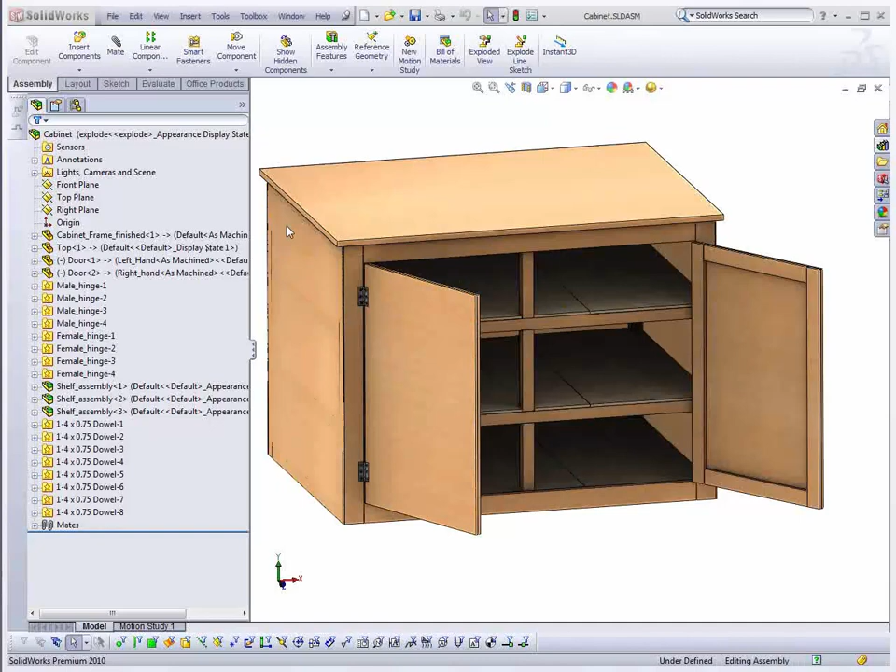This is a cabinet demo, which is another one aimed at a demo backwards approach, where we've got a finished product, and it's really more focused on the assembly level capabilities than on the part level features. Even though we've got weldments which make up the frame and the sides and so on, it's set up to really focus on the assembly level capabilities.

There's two elements to that. The first one we're going to look at is the smart component features. So you can see here we've got hinges which are part of the smart component library. We've got male and female hinge components, and when you do the smart feature on those, it does a cutout in the parent component that you've mated it to, and it also adds these wood screws automatically as well.

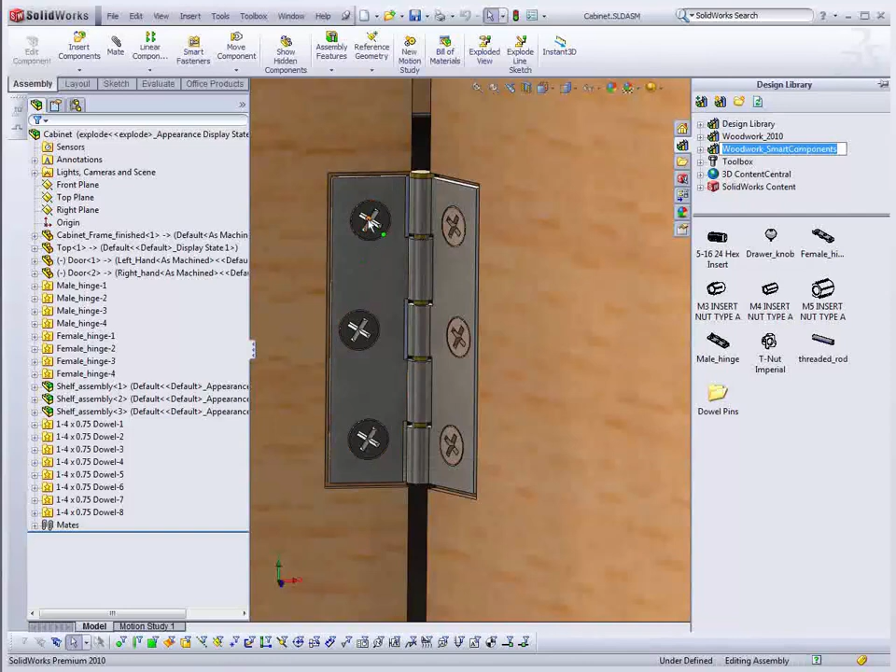One thing I noticed it doesn't do is it doesn't put holes for the wood screws, but we can fix that at a later point.

If you look at this frame, you'll see I've actually got coordinate frames set up here, and what I've done is I've put those there so that we can use the dowel rods to automatically put location pins to position the tabletop or the countertop on this cabinet automatically.

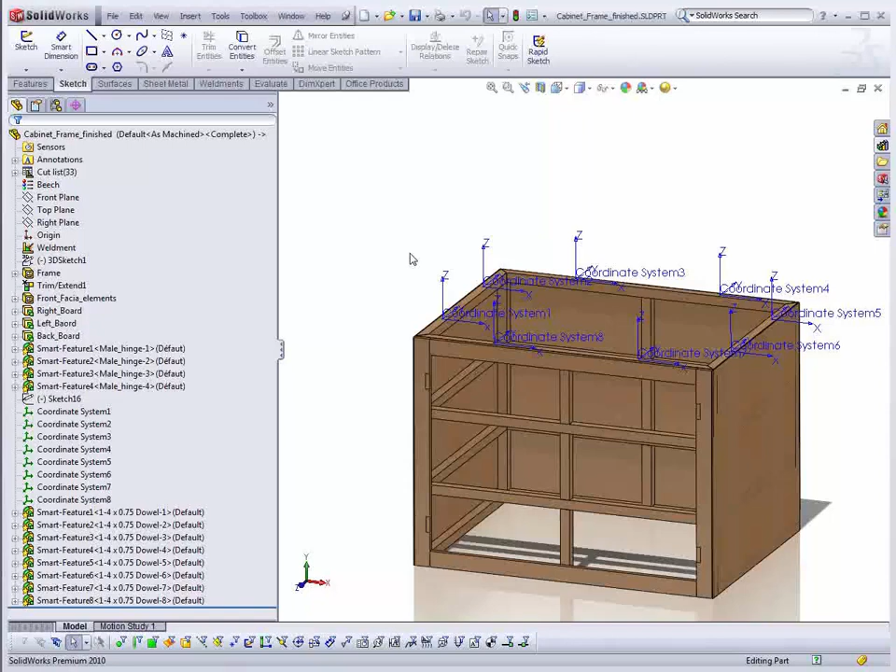So you can see here, if we go to our exploded view, we've got our dowel rods and our tabletop. Let's just turn ambient occlusion off for the minute. So our dowel rods go in, and then we can put our table on.

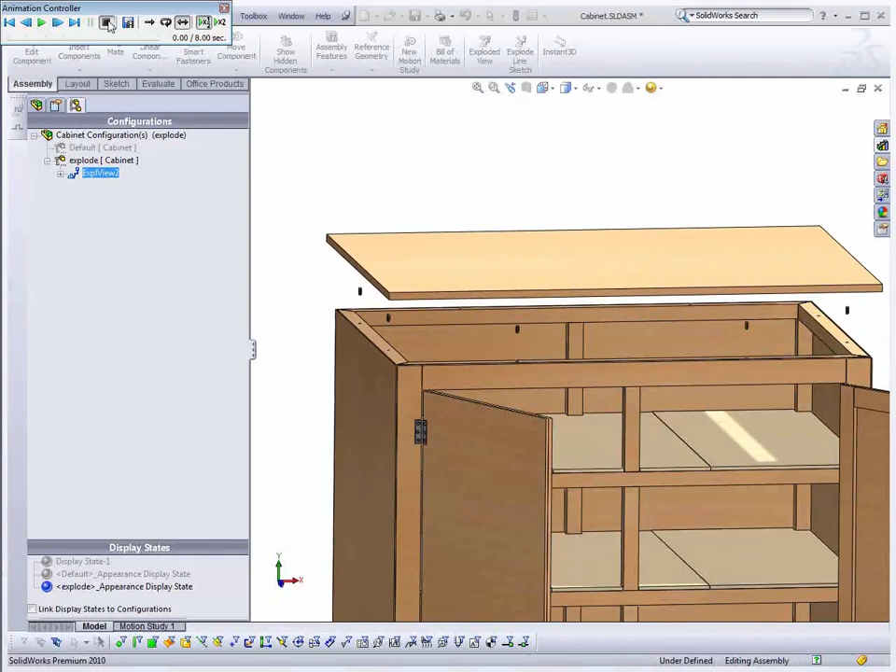Now I don't have fasteners mounting the tabletop specifically. It's something I could do if I had more time, but I think you'll get the idea.

Notice that there's shelving in here, and one of the important features about developing something is making sure you can actually put it together. So obviously, because the door opening is smaller than the width, you can't put single shelves in there unless you do it without the top on or something.

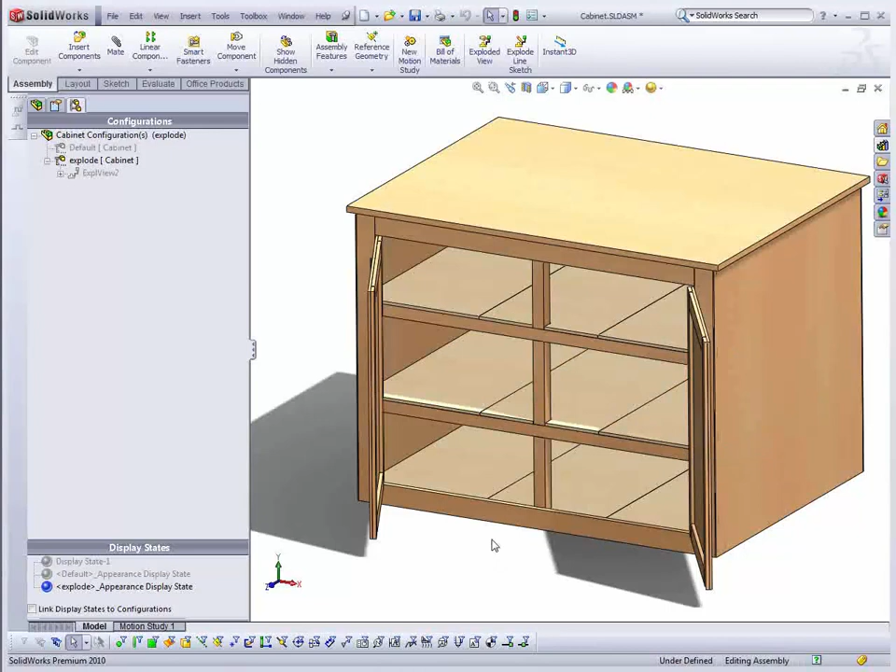So what I did is I split these into 3 elements, but there still needs to be work done to verify that it can fit in there correctly. So let's have a look at how we can do that.

What I've done is set up an example model with a single shelf to make sure we can do that.

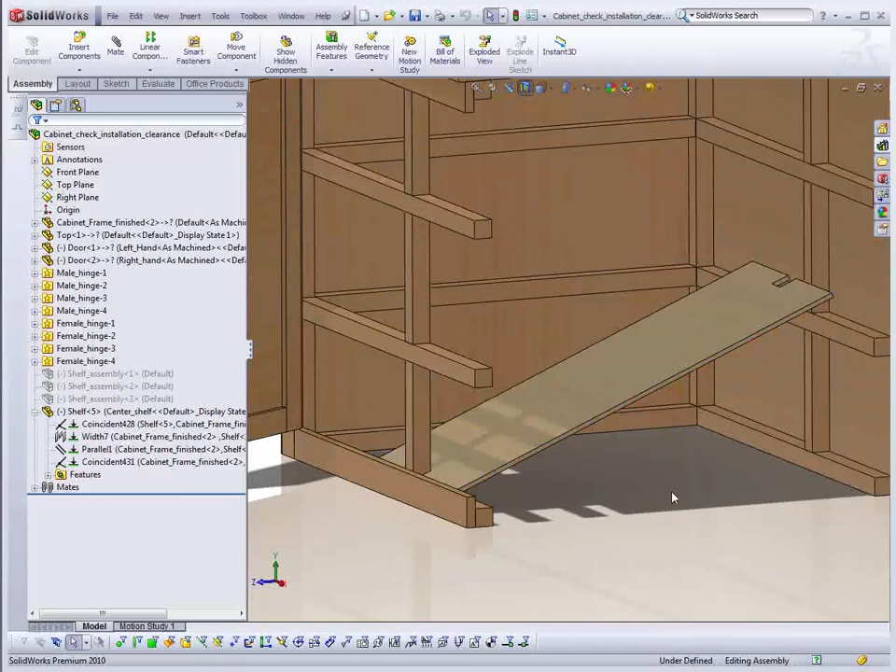The way this works is you get the shelf in, angle it up, slide it in to position so that then you put it over the slot. What I've done is I've mated these two components, this back edge to the side face and the bottom edge to the bottom face there.

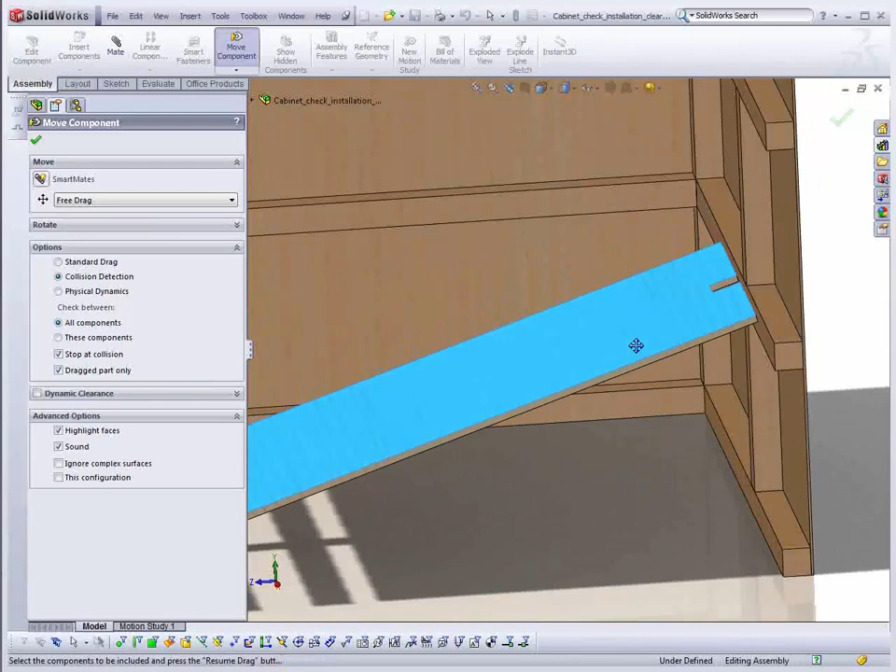And then we can use drag to look at if it's going to work or not. So we'll use collision detection, and we'll just do dragged part only, and I move it down, and it says that that's going to interfere, so we're not going to get the clearance we need to put that in. So that's a bit of a problem.

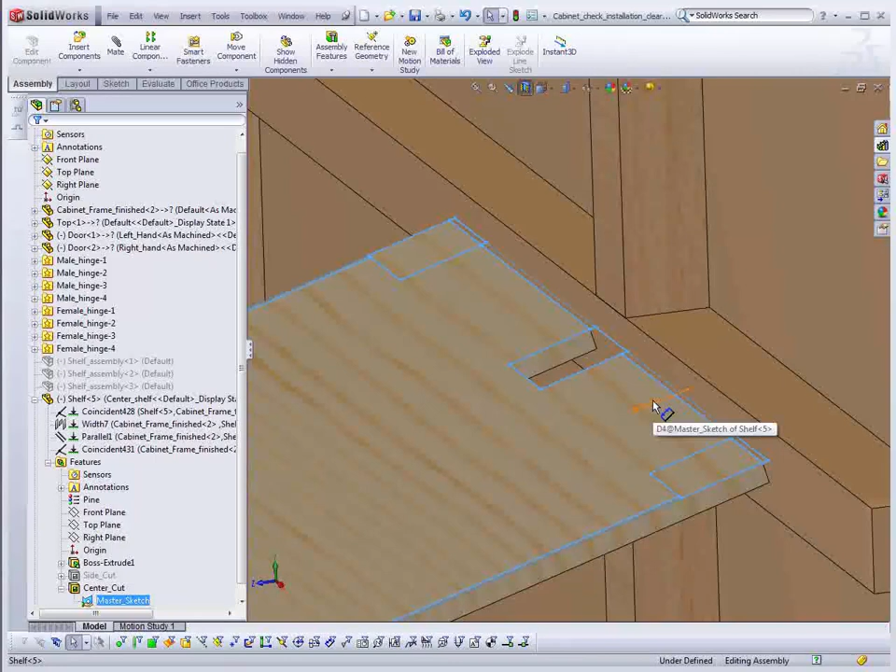So what we need to do is come in and adjust that. To do that, we have a sketch here, and actually what I do is I just put a clearance setting here, so we can come in and adjust that, maybe make it just over 0.3 inches, do an update, set it back up here, do the move component, collision detection, and now we get all the way down.

Now there still might be a problem getting the top shelf in there, so we may need to increase the height of the shelving or reduce the depth or something to fit that in yet. But that's just one example of how we can apply it.